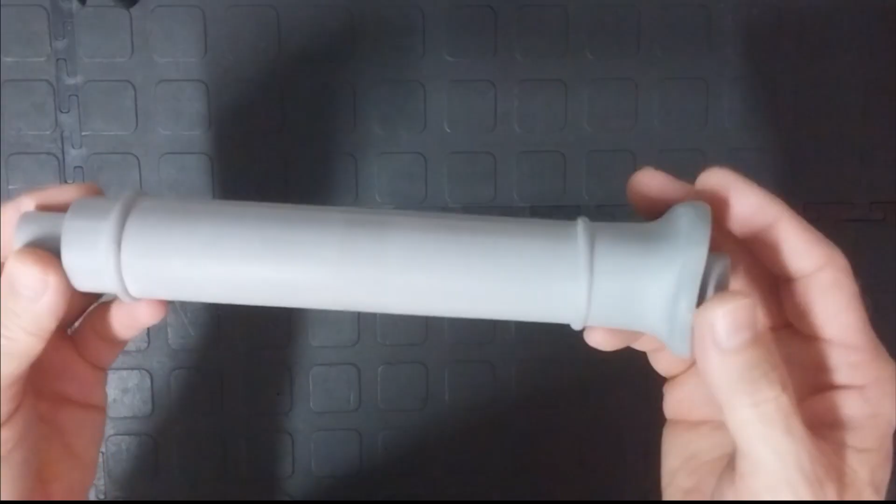Check this out. I'm at the point of the build where I need to do a couple of patterns and I need to do a few castings for the next batch of things that I'm going to machine. And typically this goes in stages as the build progresses because I have 7 flasks in total and it takes me about 5 or 6 hours, one day to mix up the sand and fill up all the flasks, and then I cast the next day. But I do want to show you some of the patterns and how they're going to fit into the actual Willis Farmers engine before I continue with the cylinders.

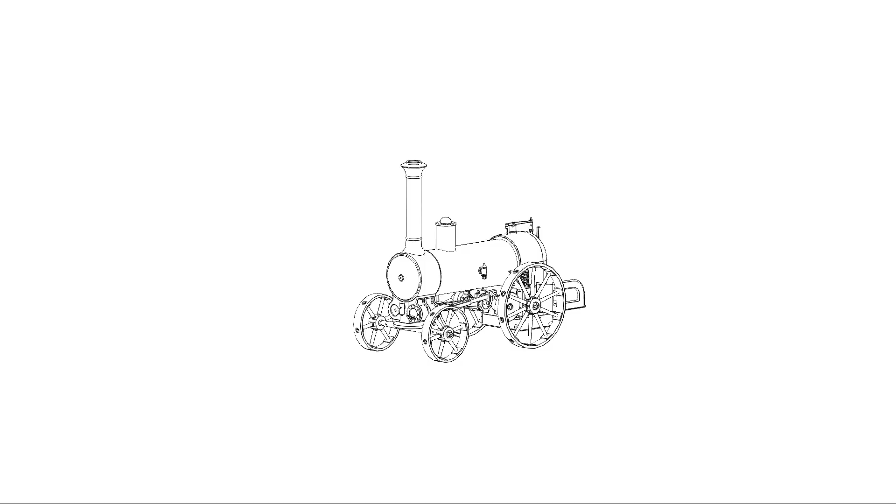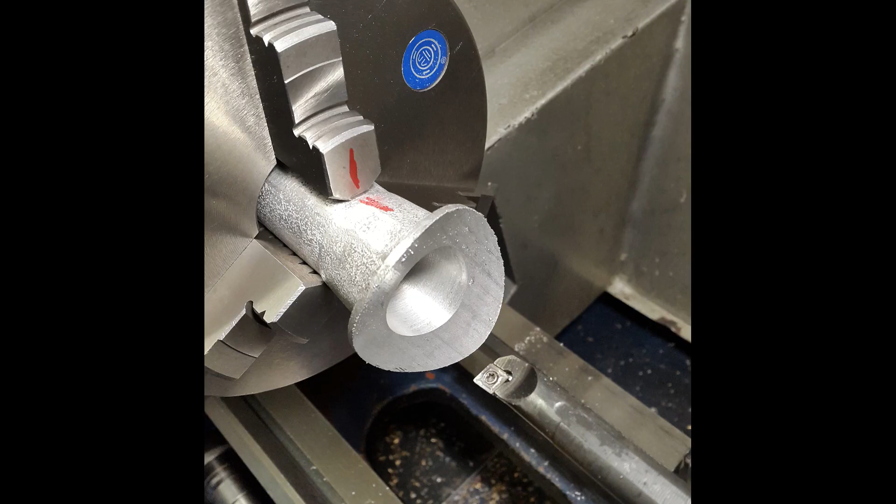The most interesting is always for me the chimney. Now, the problem with the chimney, and most of these chimneys of pretty much all of the locos above 3.5 gauge or steam engines that are sort of one inch to the foot and larger, is it's quite difficult to hold this in a home workshop lathe. The problem is the back end is bigger than the chuck or the spindle. So it's always easier to hold it on the smaller side of the chimney, but then the cap always gets in the way. So what I like to do is I split my caps.

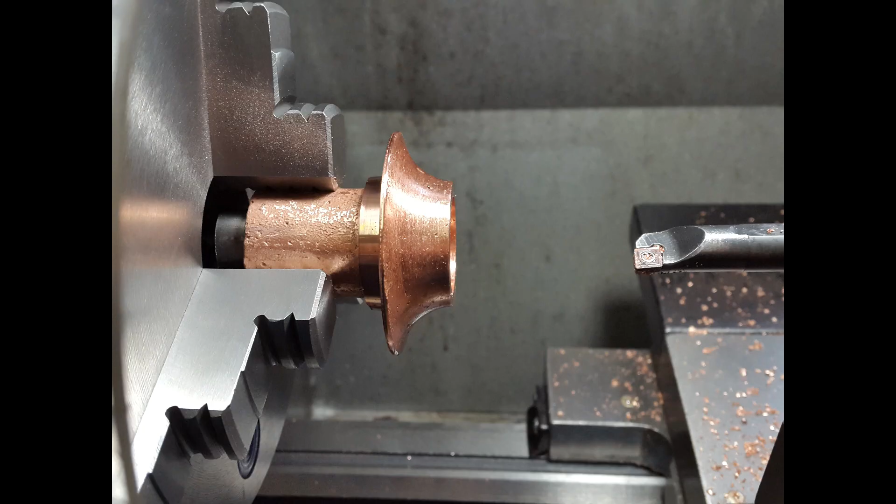Now I'll get to how they go together in a second, but if you hold it like this and you machine from this end, then everything tends to work out because you got your taper and then you got your back taper towards the end, and this goes in with no issues, and then your cap can be fitted and machined towards the end. What makes it a lot easier is the caps are typically a brass or a copper. A lot of the older sort of steam engines had copper. The newer ones or the display ones that the railway lines used to use were brass, but they were more for display.

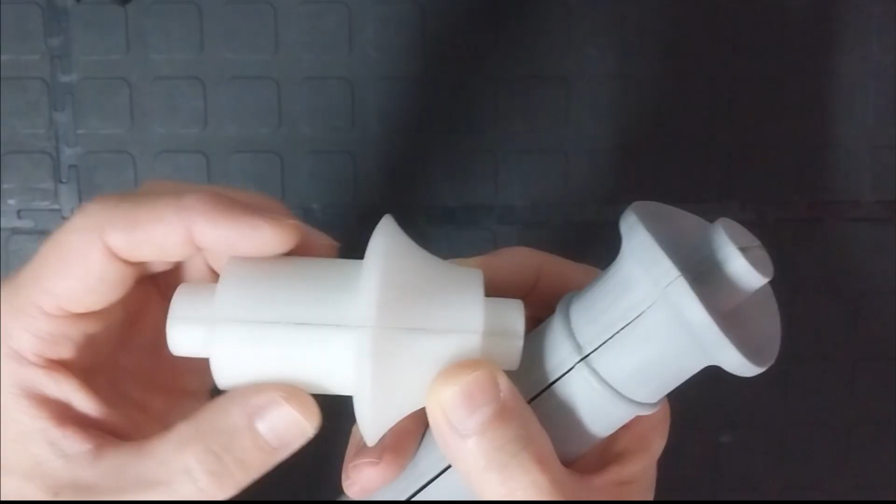So typically what I do is I make the chimney out of aluminium so that I don't have a long piece of brass. So the center of gravity of any steam loco that I design is slightly lower, but the cap can be made from copper or brass. I always add a spigot to the cap so I can chuck it and I can machine the end, and then this will just be a press fit at the end of the aluminium chimney.

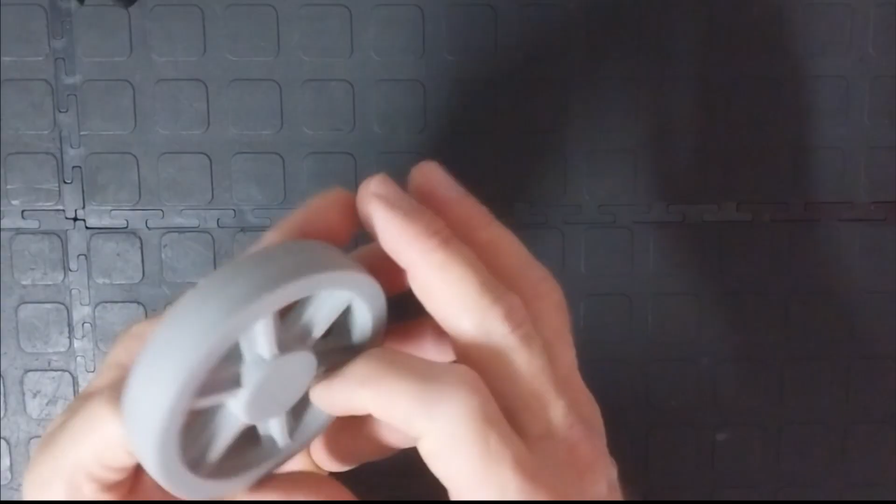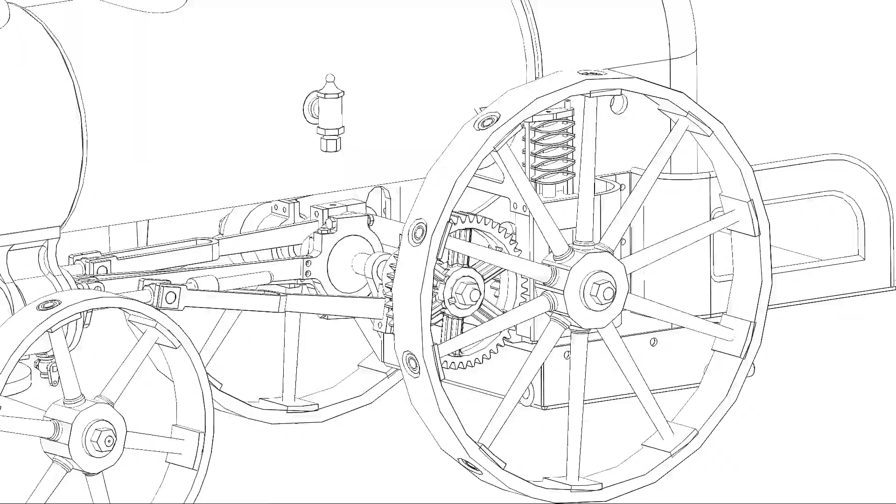But for this video, I'm just going to talk about the castings for the Willis Farmers engine and the next steps. So that's the chimney. A really cool casting is this gear casting. Now, one of the coolest things about 3D printing is have a look at the detail that you can put into this pattern. And also you can do both sides. A lot of guys only do one side of the pattern and then they make the back end flat because you're not going to see it, but you do see it on certain engines. This has got a star sort of configuration for all the webs on the inside, and all of these faces are drafted, so it's very easy to get out of the sand.

Now, this is exactly how the original would have been. It would be very difficult to replicate this with a wooden pattern. So 3D printing is really one of the ways to go if you want to make your own patterns. And then again, this is a 2-part split pattern.

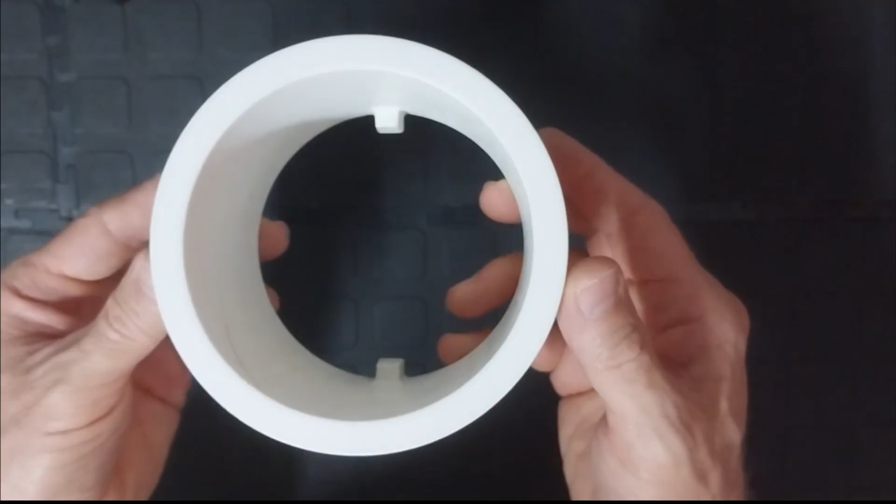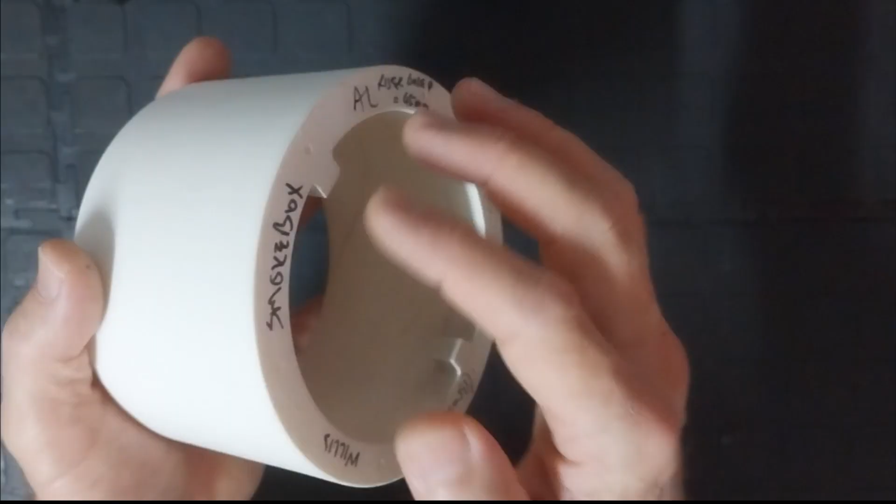One of the weird things that I'm doing very different on the Willis Farmer's engine is the smokebox. I'm making a single casting. Now, normally what I would do is I would make a front plate and I would make a backing plate. I'd roll a nice piece of plate and I'd weld it all up, and I'd end up with a nice smokebox. In this case, I'm actually going to cast this as a single component. And there's a couple of reasons for that.

First of all, if I cast it as a single component, I can actually make it a lot heavier. And that's typically what you want with a traction engine. You want the front end a little bit heavier than the back end so that the front end doesn't pick up when you take away at speed. And I've changed the gearing on the Willis Farmer's engine to make it a little bit more fun for the kids in the street.

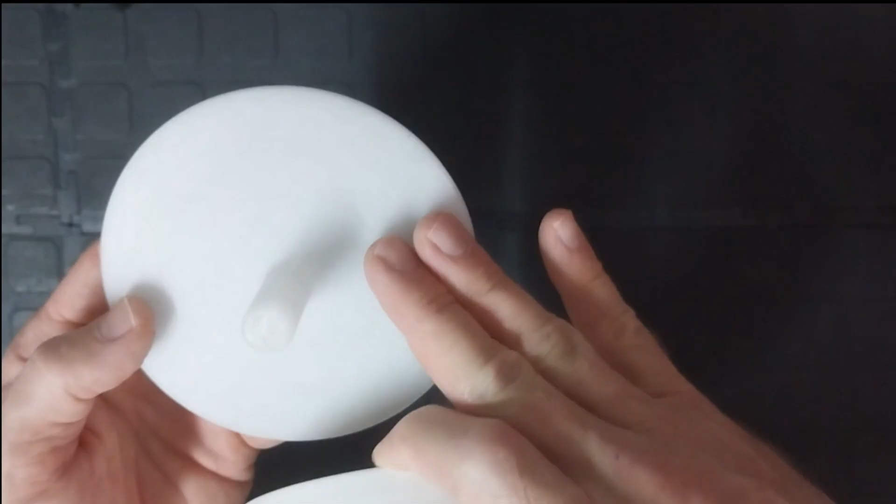What also makes life a little bit easier is the smokebox door, and incidentally, this smokebox door hasn't got the hinges or anything cast into it because the gear for the steering would come in the front, so you wouldn't be able to hinge it away. What you would typically need to do is pick it off like that. So there'll be a recess like the original, and this smokebox door will sit inside the recess and it will seal really, really well. So this simplifies the smokebox for the Willis Farmer's engine quite considerably.

And you'll notice, just for interest's sake, on all of my patterns, I have these symbols written on the patterns. I typically have how large or how heavy the casting will be, because then I can work out how much I need to pour. And in this case, I'm not sure if I'm going to make it out of aluminium or brass. I have a feeling that I'm just going to use scrap brass or cast iron so I can make the front end a little bit heavier.

Now, casting modulus is just a ratio of your volume to your surface area. All the heat that gets extracted from the part that you're casting is through your surface area, and the volume is where you're going to end up with the issue. So if you have a high volume part with a low surface area, you're going to end up with voids all over in the casting. So that ratio tells you when you need to start worrying about feeding and stuff like that.

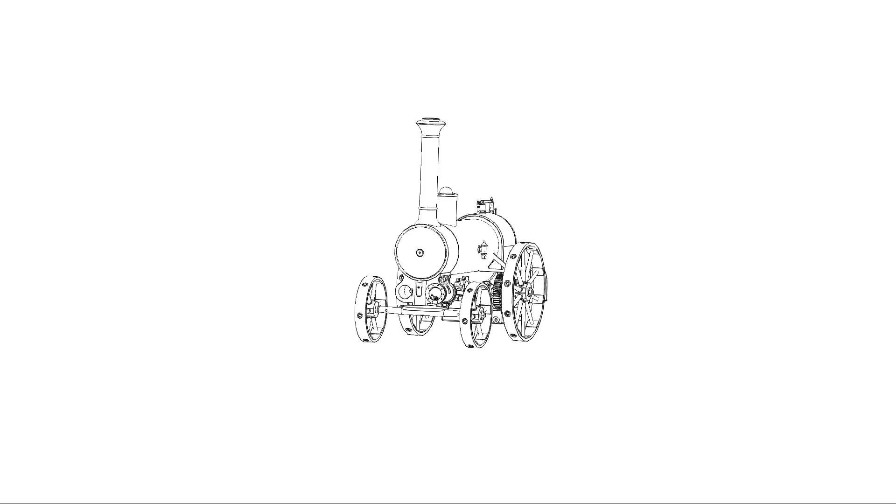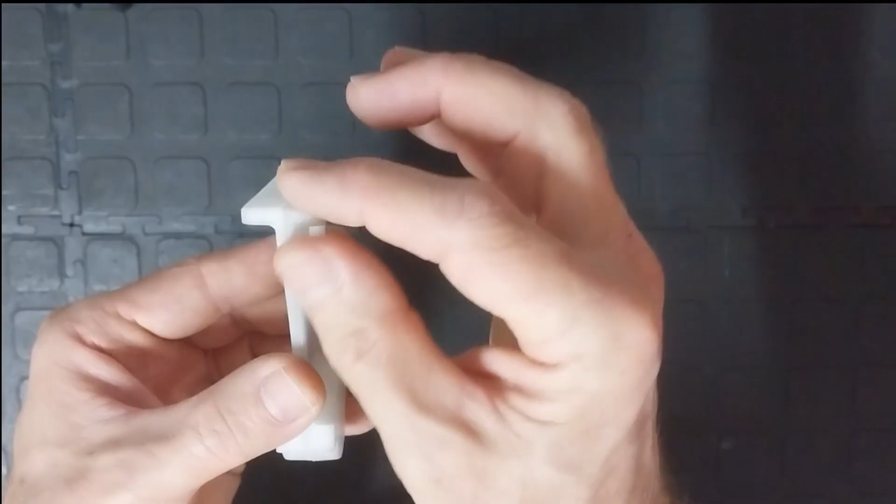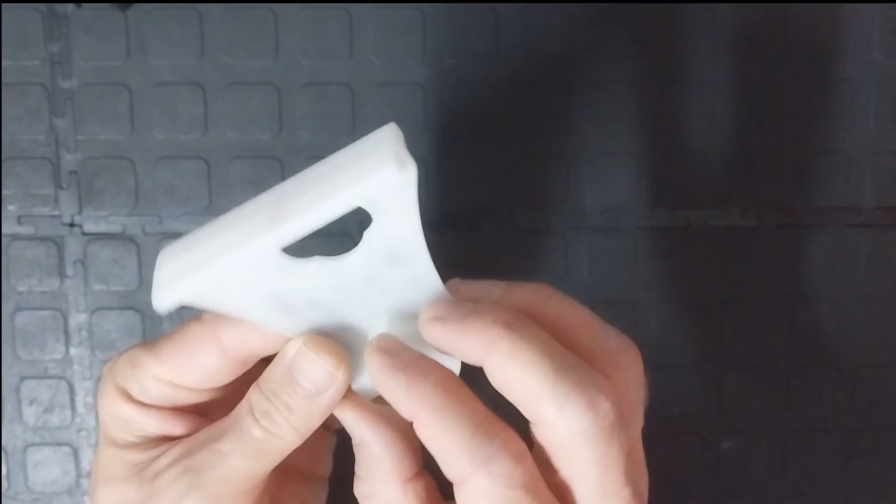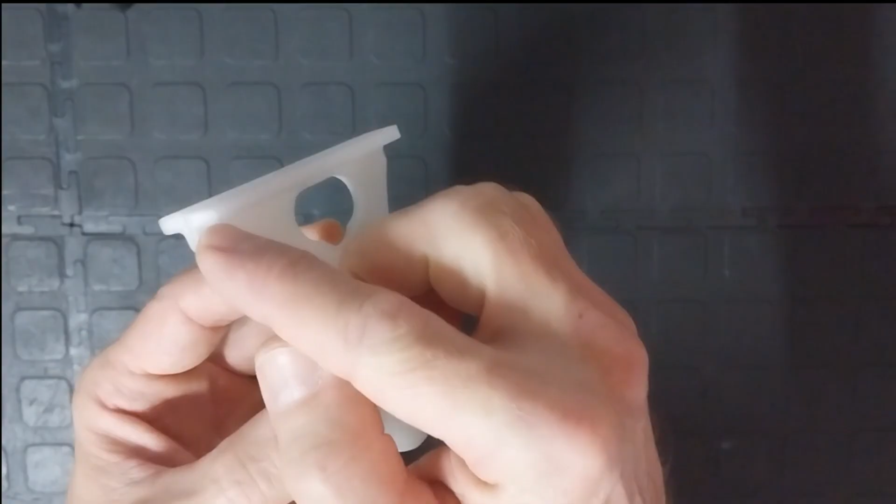Another interesting casting is the bearing stand for the crank. Now, here's another little trick with patterns that I talk about on the Patreon video. This was typically a one-sided pattern, so the angle was on the right hand side, and on the other one the angle was on the left side, so it only had the one angle. It makes sense to duplicate this, so you double it on both sides. Then you only have one pattern for both components, and if you cast one extra component, you have a spare for both sides, and after it's cast, you just cut off the side that you're not going to use. This pattern is 3D printed, and I think it looks pretty good.

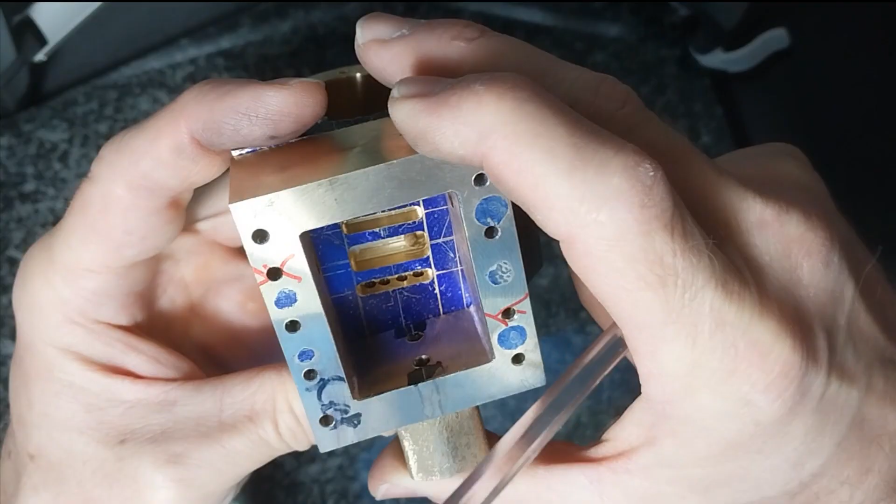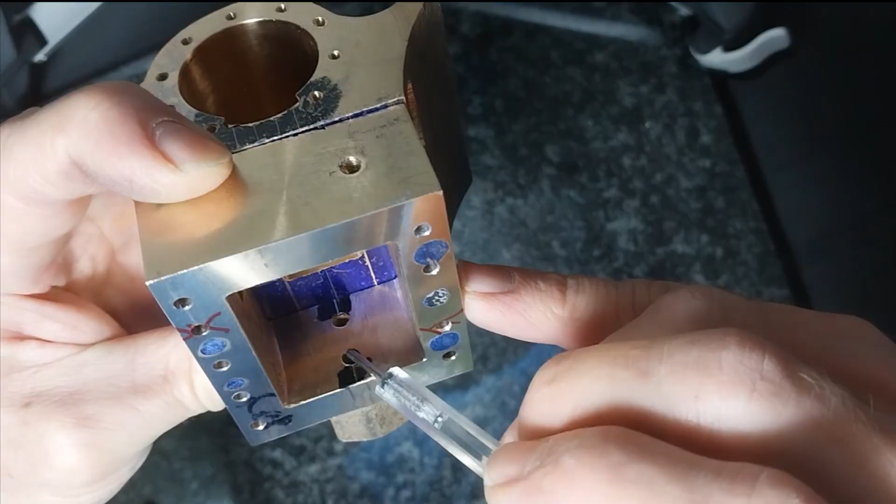So assembling this valve chest to the cylinders is actually a bit of an issue, because you do need to align the center valve spindle to the center line of the cylinders. So what I typically do is I mark it on the side and then I draw the center line through the valves, and then those 2 points just need to match on the one side.

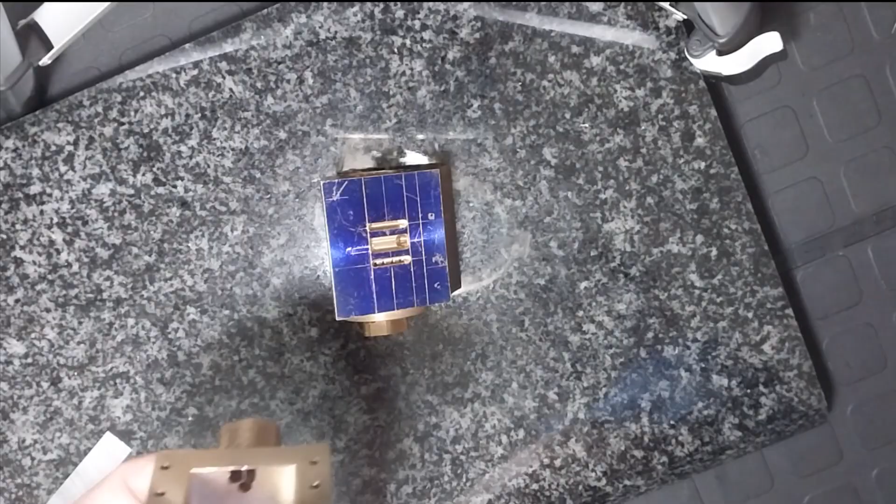Okay, that's pretty easy. Here's the issue. Once you line it up and you clamp it in the vise, this will move. Because you've got two surfaces that are very, very easy to move around, you do want to fix them. So here's a really, really cool trick. What you do is you just put 1 or 2 drops of super glue, and you only really do need 1 or 2 drops.

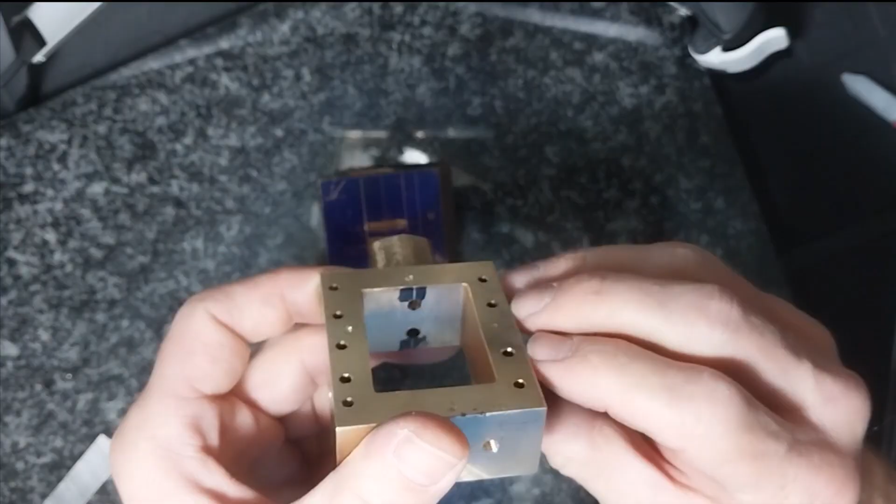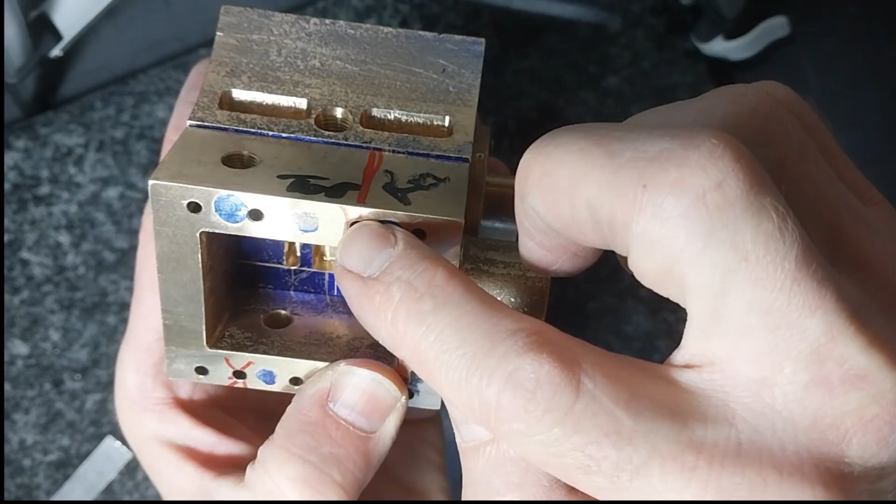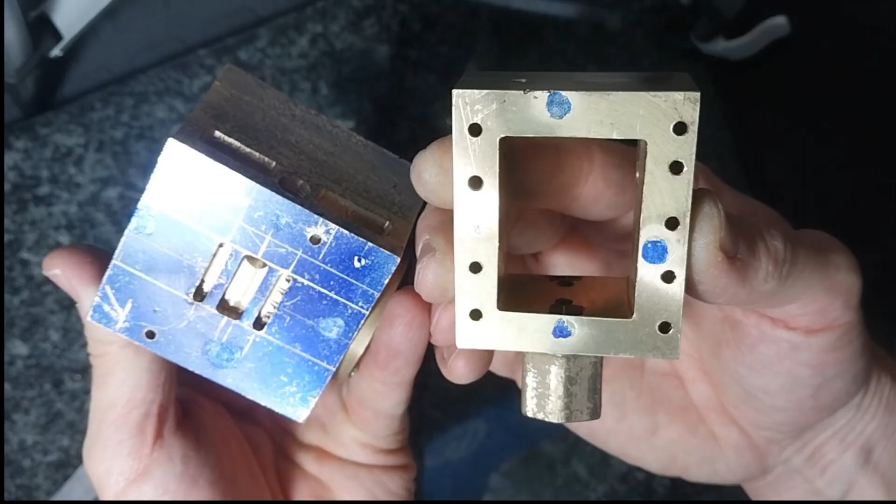And then you align it for clamping in the vise to drill your 2 holding holes. So I've drilled my 2 holes, the one straight through there to the other side, and those 2 will clamp for the rest of the holes, and I've aligned it up nicely. The nice thing about super glue is it comes off relatively easy. So now we can clamp using these holes, and we can drill the rest of the holes.

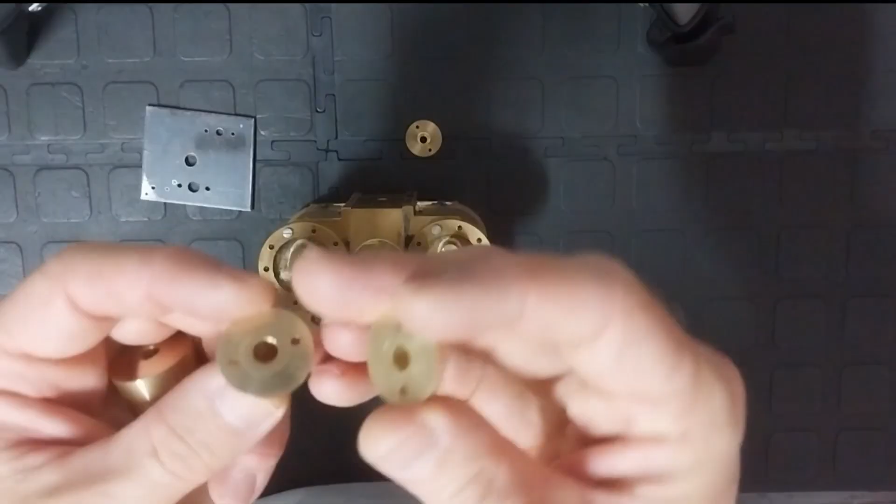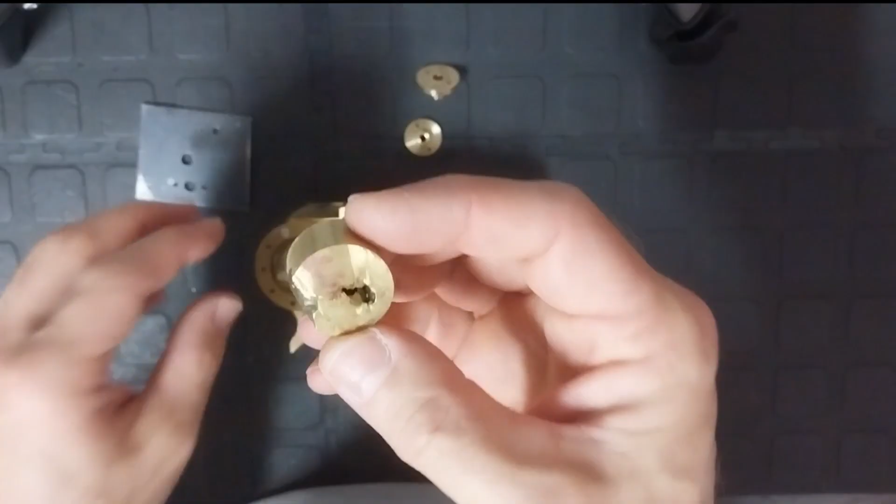So the next step is making the glands for the valve chests and for the cylinders themselves. Now, I haven't shaped these, and I'll show you now how to drill the holes, but typically shaping this is a 5-minute job. You don't need the milling machine to shape it. I'll show you how to do that with jigs. Just quickly, all of my glands are made from the risers from all of my castings.

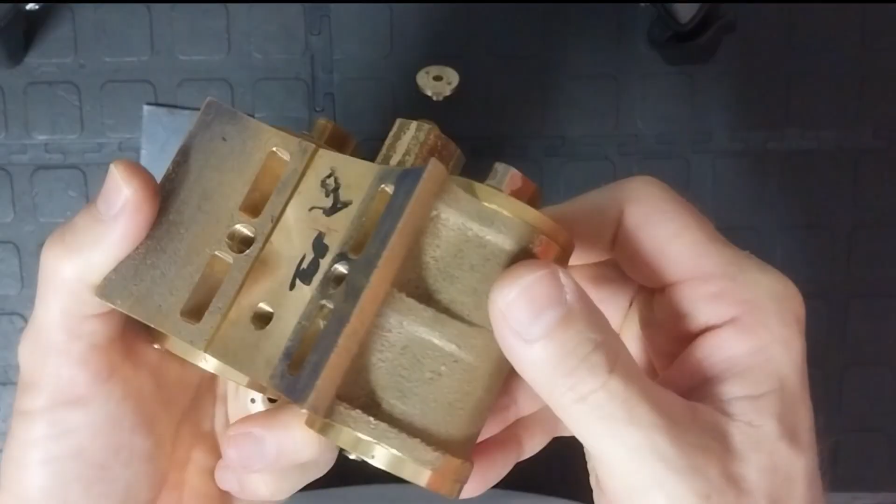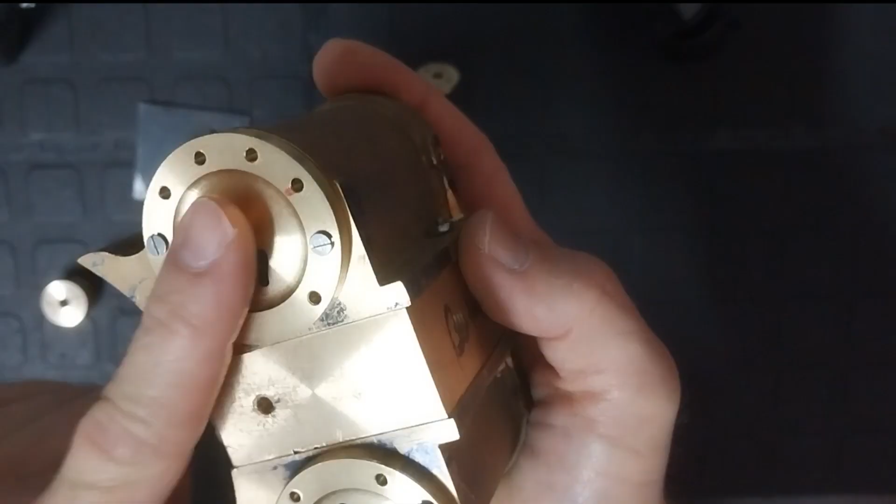So when people say that these trains cost a lot of money, they really don't. This looks really expensive, the cylinder assembly, but to be frank, this was all made from scrap. These large caps were very, very large cylinders that I cast, so they were scrap. All of this was cast from scrap, and then even the valves are made from the risers. How cheap can that be?

Typically, all the valve chest and the piston rod needs a proper gland to seal it. Now I ream my holes through, so I get a good seal anyway, but I still put a gland in because the originals had glands, and also as it wears, you tighten up your packing, and then you don't get any steam leakage from your cylinders, which of course you shouldn't.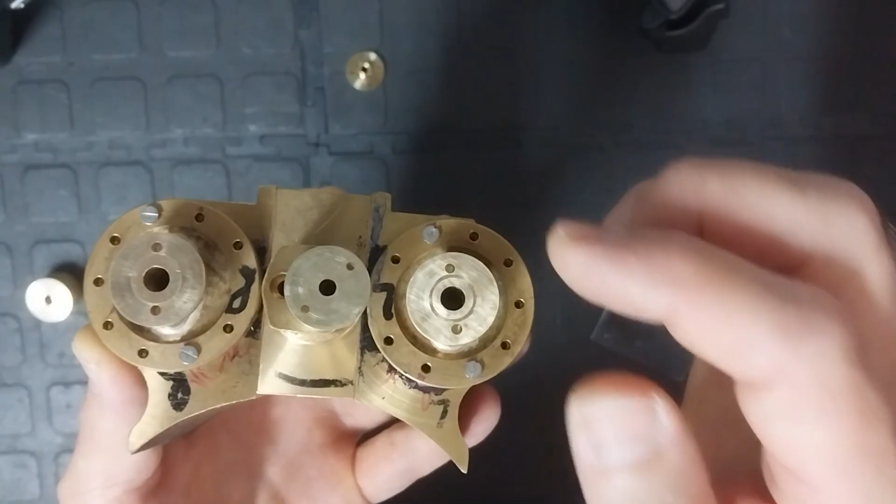The problem is drilling these 3 holes for the gland is a bit of a trick, because if you drill the center hole and one of these holes is slightly to the side, then these aren't going to line up, and then the gland will only fit one way. It won't fit both ways. Another issue is you really want your 2 opposite glands to be identical and symmetric. Now to get that right is tricky because the holes are typically quite small and the middle's a reamed hole. But there is a nice way of doing that.

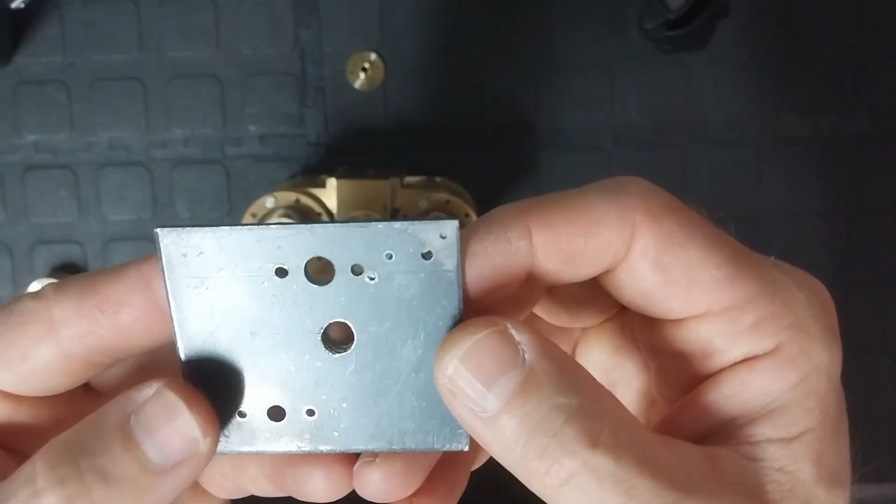For all of my glands, I make myself a little drilling jig like this. And what I do is I drill 3 holes in line and I set it up on the mill. Nothing needs to be aligned. It can be whichever orientation you want. You clamp it, and as you drill 1 hole, you don't change feed in this direction. So then you drill 1, 2, 3 holes all in line, and you know that they're perfect.

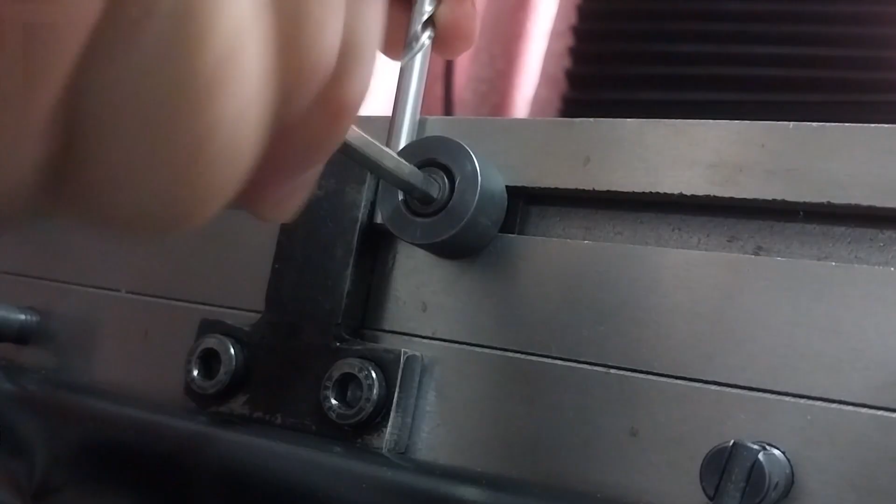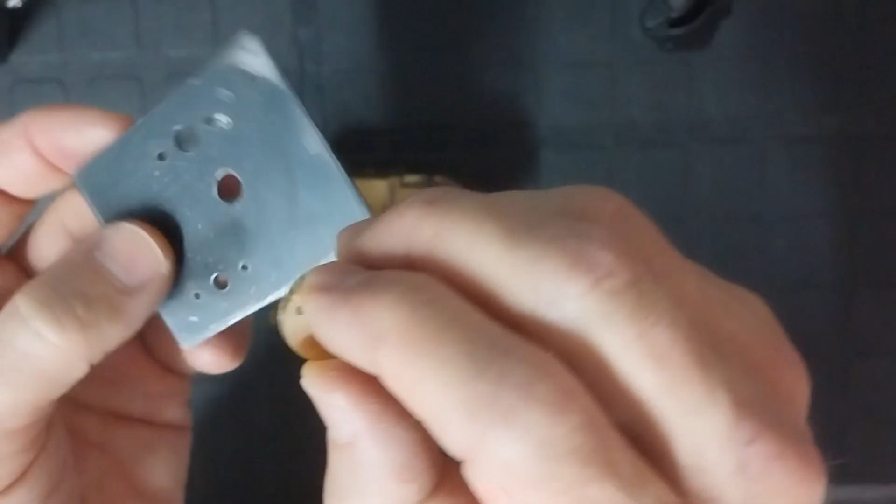Getting the distance from that center line to that center line is using stop gauges. I don't use my dial wheel on my milling machine. And if you use stop gauges the exact same way that you used them when you were doing the valve chest, you get excellent accuracy on those 3 holes. And then typically you just clamp the gland onto one of these jigs like that, onto the center hole, and then you just drill the 2 outside holes and you're good to go.

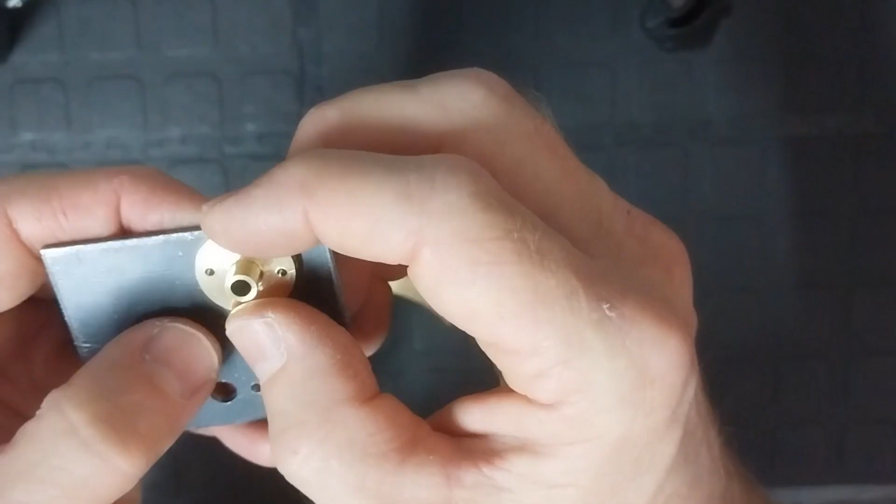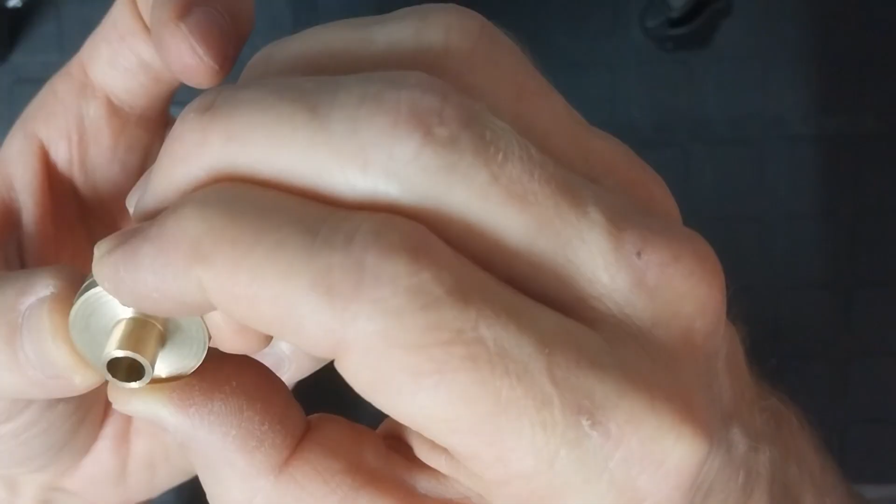The advantage of doing this is actually very, very cool. If you put these 2 together and you line up the center hole, you will notice that both outer holes line up perfectly. Now, how cool is that?

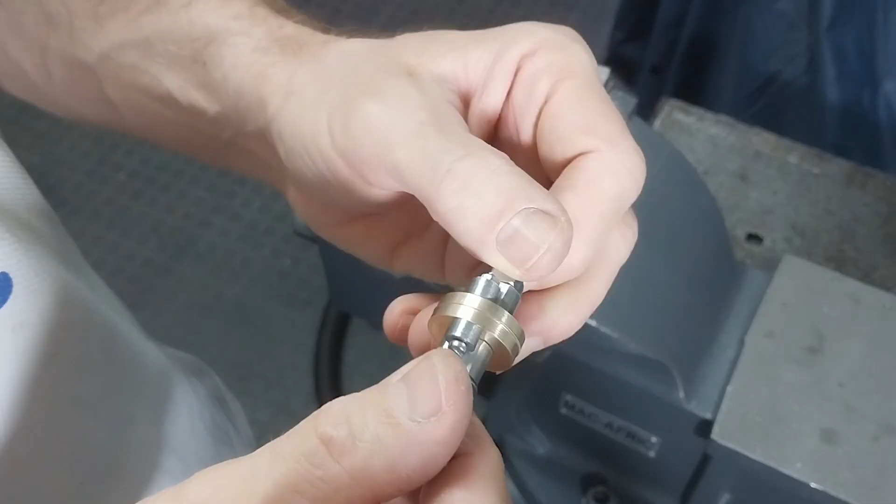To finish off shaping the glands, all that I do is I use engineering buttons, and all that is little cylinders that are bolted together with the glands back to back, and the outside gets filed. And that is typically a 5 to 10 minute job. It is way quicker than putting it on the milling machine and doing all sorts of fancy milling operations.

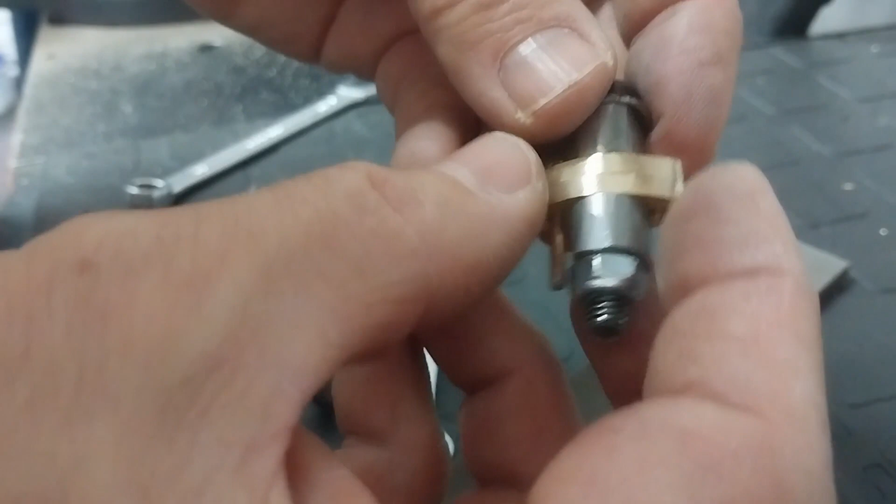So if you want a perfect symmetric gland, which is obviously what you want, you take it apart, you flip it 90 degrees, you put it back together. And this one you can see actually is very, very close. And just a little bit of emery cloth over the side will make this shine beautifully. I actually don't normally paint my glands. I leave them like this.